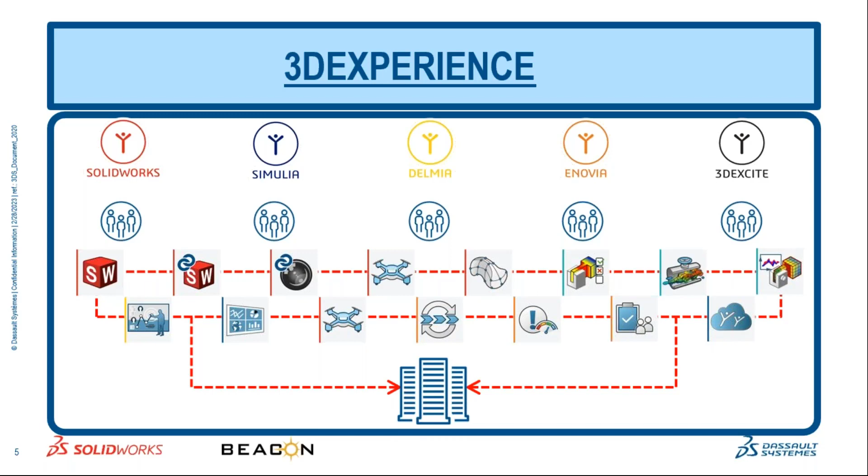So this makes sure that your complete organization or team gets to collaborate easily, smoothly, and in a fast manner.

Before we begin, today we'll be focusing on simulation, especially electromagnetic simulation. But what is simulation, and why do we need it? Our main objectives for requiring simulation are: one, to decide on the best project or product design, choosing between multiple alternatives—you will have various revisions or alternatives to your product.

But which is the most optimal or the most efficient design that you can make use of? And to perform various trade-off studies from a large pool of all this data.

Another aspect is to reduce the risk of failure. Especially in electromagnetic simulation, you have various tests or certifications that you have to perform, and you need to clear all these testings and standards. This is where simulation comes into picture, wherein you can virtually test or validate your designs even before you go ahead with a prototype.

And also to shorten design cycles. One part is the collaboration that makes it much easier to collaborate between different teams, from your designer to your simulation engineer. The collaboration is much easier.

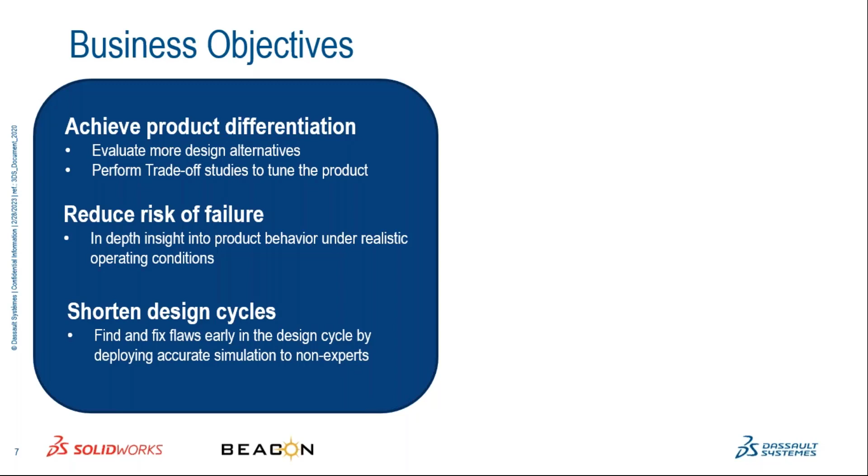And today we'll be looking at the workflow - what a designer does once the design is ready, how the validation engineer can access this data and perform analysis or simulations and run studies, and then if there are any revisions that can be done.

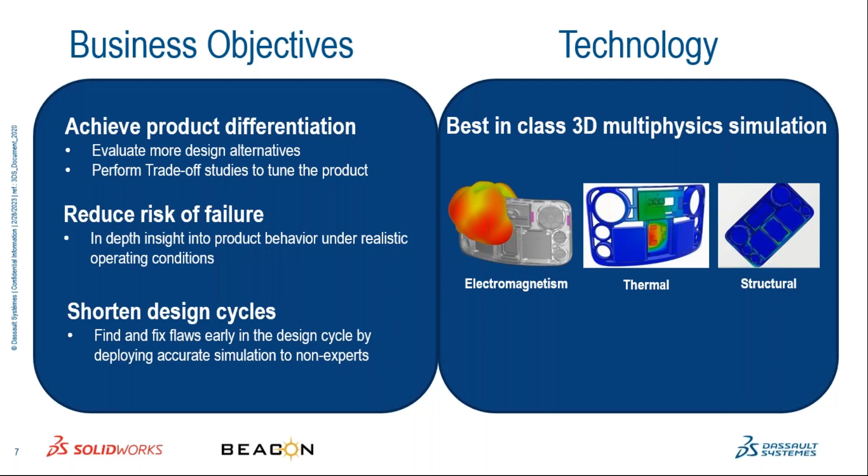Now, the technology what we have to offer. We have multiple simulation products catering to different areas, that is electromagnetism, thermal, and also structural. All this comes under our SIMULIA portfolio. Today we'll be focusing on electromagnetism.

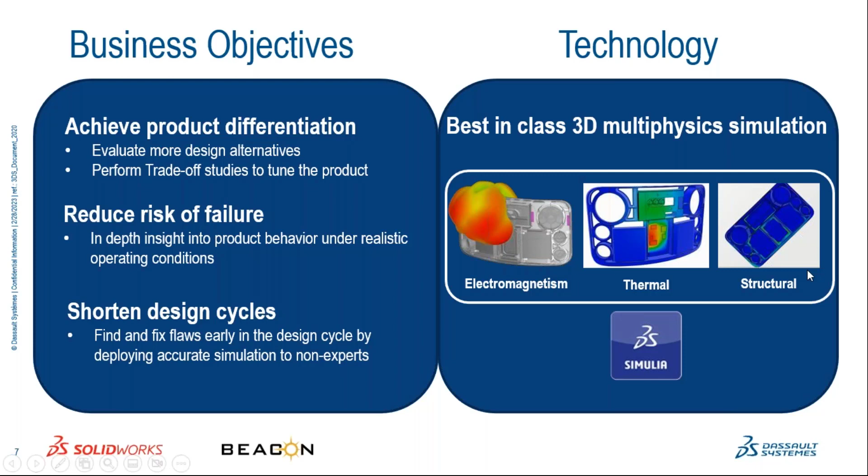So, what does the 3D experience platform offer us in terms of electromagnetics engineer? As I mentioned, because of the collaboration, there is easy access to your CAD data. Once your designer is ready with the design, he just uploads it onto the cloud platform, and the validation engineer can access this at any time.

That is one important aspect here. Another part is the version control. If he has worked on the model and there is a revised model uploaded, you can also access these revision files or data uploaded onto the cloud anytime. So the team is collaborated and up to date with whatever changes are made in the project. Another important part here is the lightweight visualization of results.

You can view your analysis once your simulation is run, the results on the cloud anytime, anywhere, on any device, using a role called 3D Play, wherein it is much faster to load and you can just look at be it your antenna far fields or any plots, your electric fields, magnetic fields. All these plots can be viewed in a quick manner.

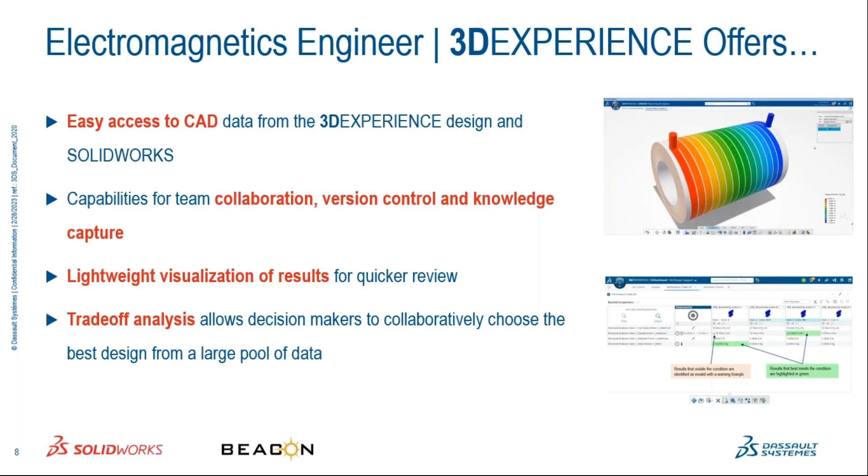The trade-off analysis also can be performed, as I mentioned, from all the different revisions or versions of your file, to determine which is the best or the most efficient design. It's much easier to choose or come to a conclusion using all the data available at your end.

The best part here is the electromagnetic engineer role also offers cloud computing. With each role, you get up to 16 cores, and this can be extended up to almost 288 cores. So that is a huge advantage here when talking about computing resources.

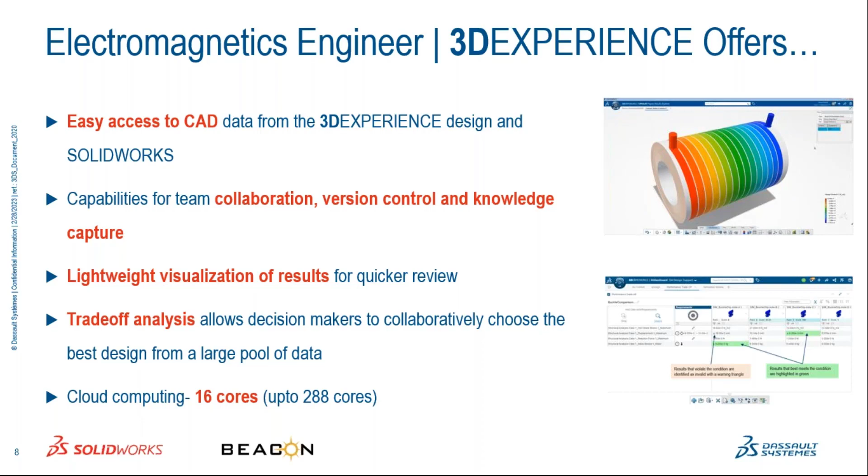Now let's move on to electromagnetics engineer. Why do we need electromagnetics engineer or any electromagnetic simulation for that matter? In today's world, we are very connected.

We have a lot of devices, or as we call them, smart products or smart devices in today's world. And everything - there's a lot of automation coming into picture nowadays, and all these are because of electronic systems or electronic components getting adopted into your system. One example is your autonomous vehicles.

There are a lot of electronics that are getting incorporated into today's vehicles. Even for electric vehicles, there are a lot of electronic components, and it becomes important that they comply with all EMC norms, all the necessary EMC norms.

Another part is there are also new markets that are emerging and moving into this EM market. Basically, your medical equipment, there are wearable devices, a lot of wearable health monitoring devices that are being made, and also for renewable energy, your solar panels and metamaterials. All of these, since they interact closely with human beings, must comply with the Bio-EM standards. These are stringent standards and certifications that they have to comply with. Using electromagnetics engineer, you can actually validate these different systems virtually and make sure they clear the certifications much faster.

And what is the product performance? We can get a detailed view into the working of this product virtually, as well as how much time it is going to take. For example, you can reduce the time to market by making sure that all the testing and all the validations are performed virtually and it goes smooth.

And if at all there are any risk of failures, basically, right from your circuit level to your PCB level, all your embedded systems, and even the assembly as a whole can be analyzed. And if they are complying with all the standards, that can be checked even before your product goes to your market.

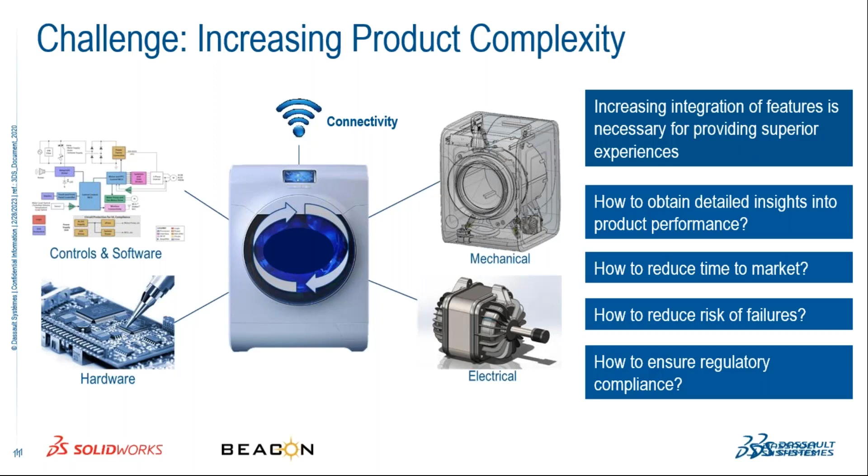Now, basically, what exactly is the solver or the engine that electromagnetic engineer uses? Electromagnetics engineer uses the SIMULIA CST Studio Suite, which is an industry-known software or tool for electromagnetic simulation, and it covers a wide range of applications, right from statics to low frequency to high frequency. So when I talk about high frequency, it can be antennas, it can be filters or other RF and microwave components and devices. It also helps you in addressing your EMC and EMI related challenges or issues.

One important feature here is the coupled simulation, which we'll be seeing ahead in our presentation, examples which make use of these coupled simulations. So you can perform electromagnetic analysis on your circuit level, system level, PCB level. You can even make use of multiphysics. Basically, there are thermal solvers, mechanical solvers available, which can be coupled along with your electromagnetic solvers. So in case of any hotspots in your design, or to identify if the heat generated causes any deformations in your model, you can make use of coupled simulations here.

There is also something called EM circuit co-simulation, wherein there is a schematic level control as well as assembly level. So that can be analyzed simultaneously, both your assembly as well as schematic, by making use of various blocks, which we'll be seeing.

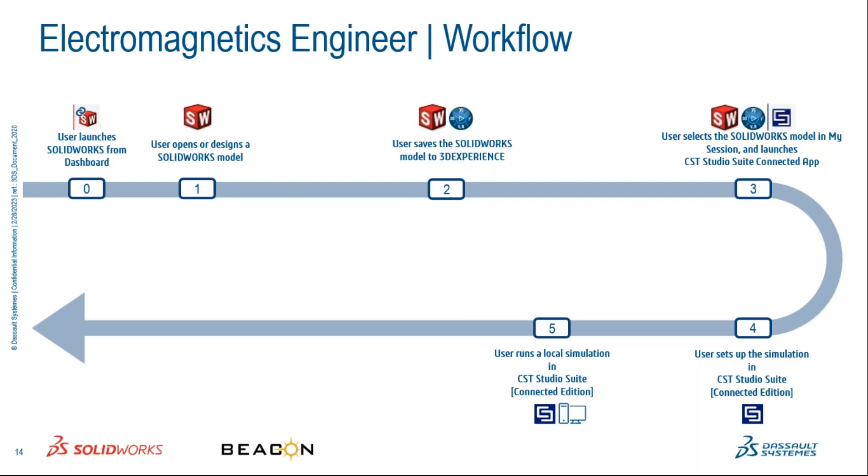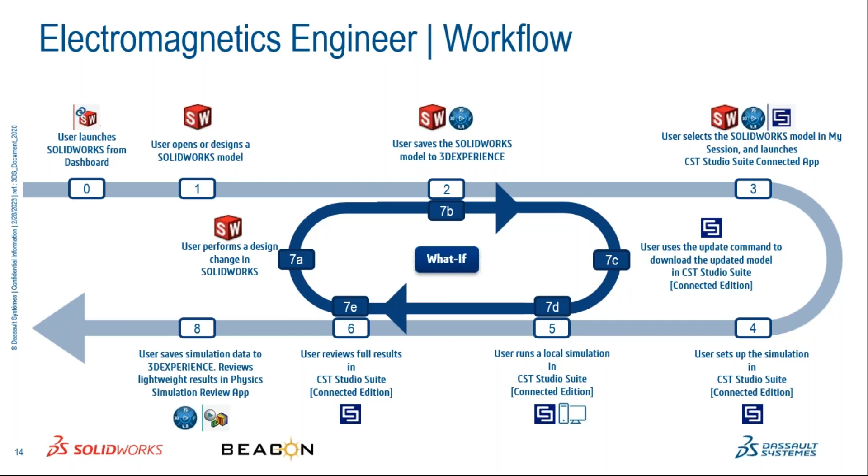Whatever required input sources or loads can be fed in using CST. Once that is done, he'll run the local simulation and validate or analyze the calculated results. He can also explore what-if scenarios, or work with a different model by letting the designer know, who can make changes. This model is again uploaded to the cloud and easily accessed by the simulation engineer, showing how smoothly the collaboration works.

Now, we'll be covering different sets of applications here with different cases. Before that, let's go through another poll question.

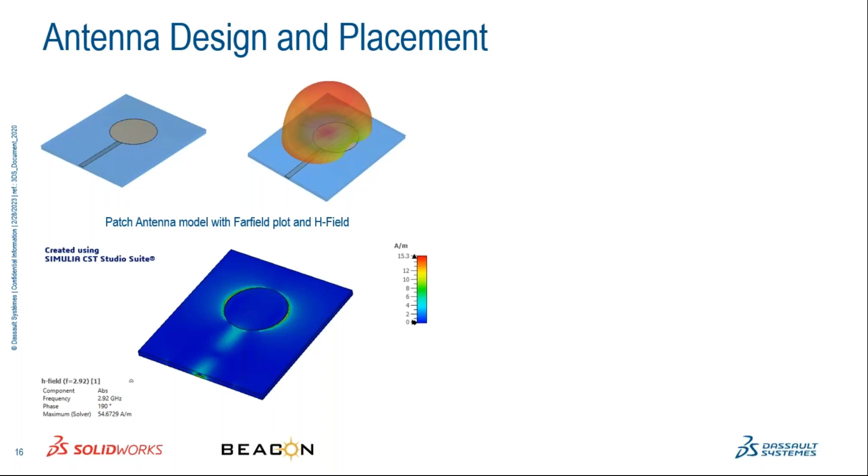Now, once your antenna is designed, another important factor is the installed performance or placement of the antenna. What happens when the antenna, once analyzed, is placed within your complete system or assembly? What is its performance? You can analyze these scenarios too: once the antenna is placed within the system, what is the radiation pattern, and how has it varied from its initial standalone performance?

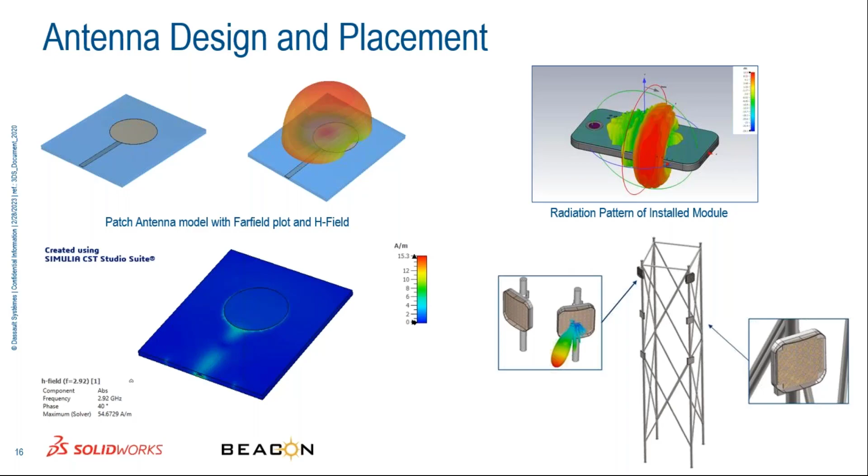Electromagnetics Engineer also comes with an antenna placement app to help you easily optimize your antenna placement and location on your systems. Let's just look at the workflow.

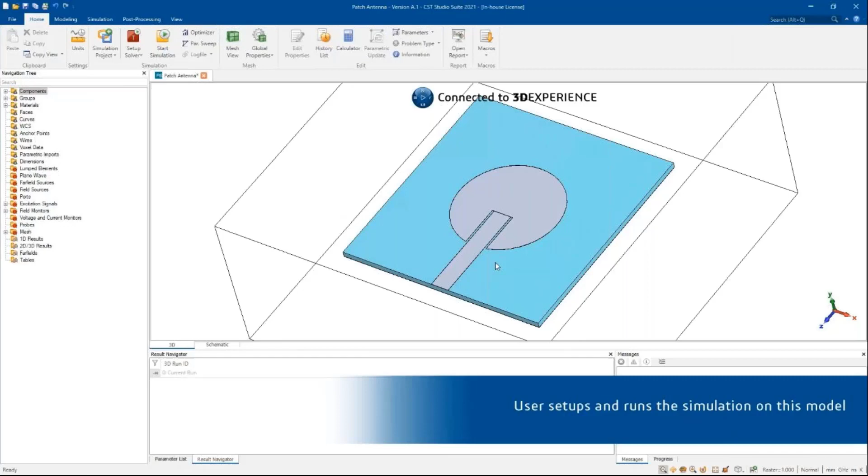So basically, the collaborative workflow here in SolidWorks: once your patch antenna is ready, the designer logs into the 3D Experience platform and loads the file onto it. Now the validation engineer can easily access this from the platform and pull it into CST. He sets up all the required loads, be it the ports for excitation, materials can be defined here, as well as any other required inputs can be fed in.

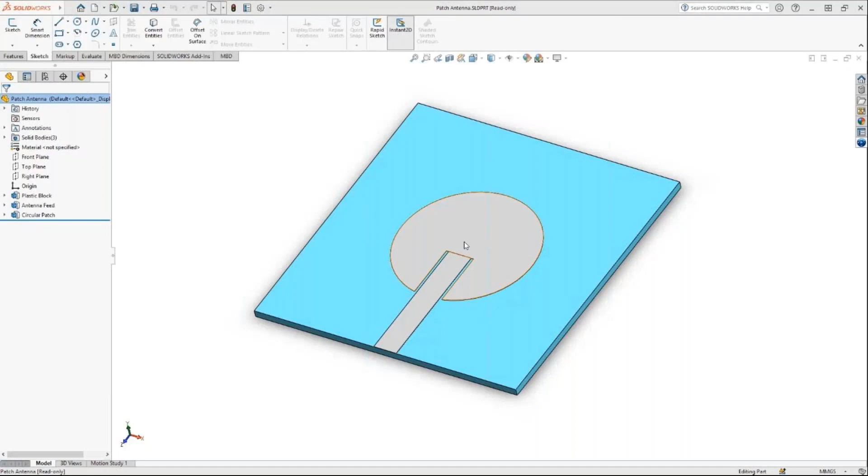Now once the analysis is done, he can also view the results, and here we see it's around 4.7, but he's looking for something at 5 gigahertz. Now the antenna validation engineer is going to notify the designer to make the necessary changes.

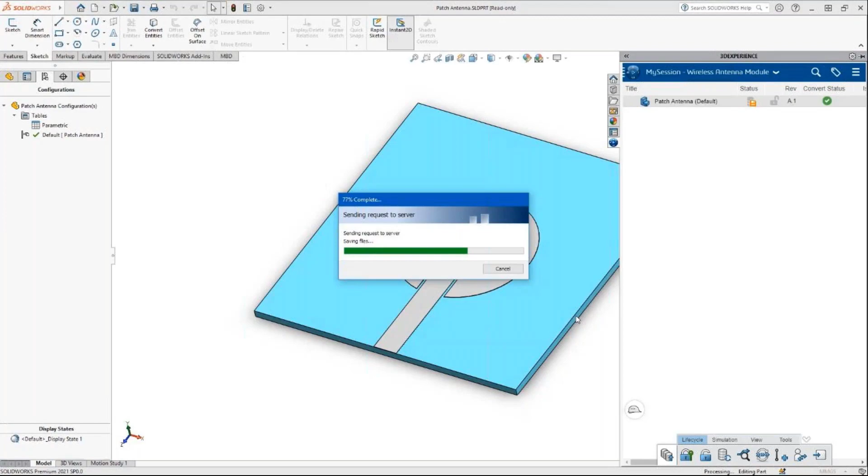The designer comes back to SolidWorks, makes the required changes to the design, and then again uploads the modified file onto the cloud. Now this file can be easily accessed by our simulation engineer, and he doesn't have to reset all the inputs or anything, because it's already set once.

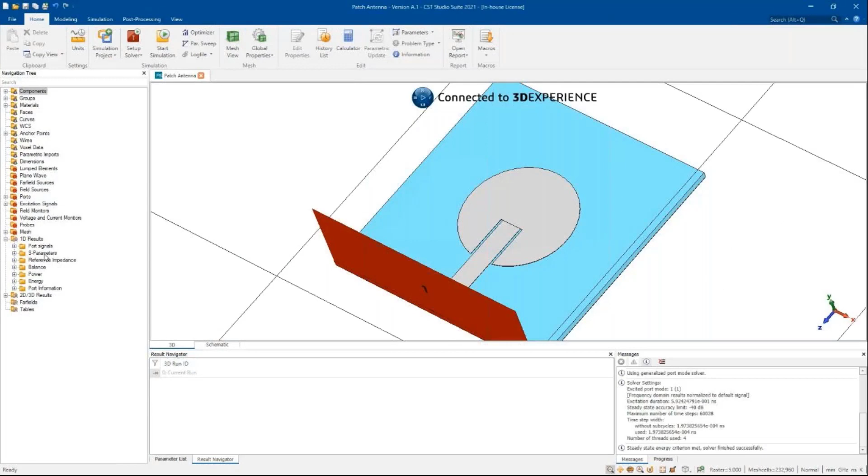So he just has to fetch the file from the cloud and rerun the analysis and view all the results and make sure if he's able to achieve the required results or not. So basically he can just rerun the analysis here, and we'll be seeing the plots, and you can see it's much better here. It's around 4.99 gigahertz, which is close to 5 gigahertz. That's exactly what we needed here. And he'll just upload these results onto the cloud platform.

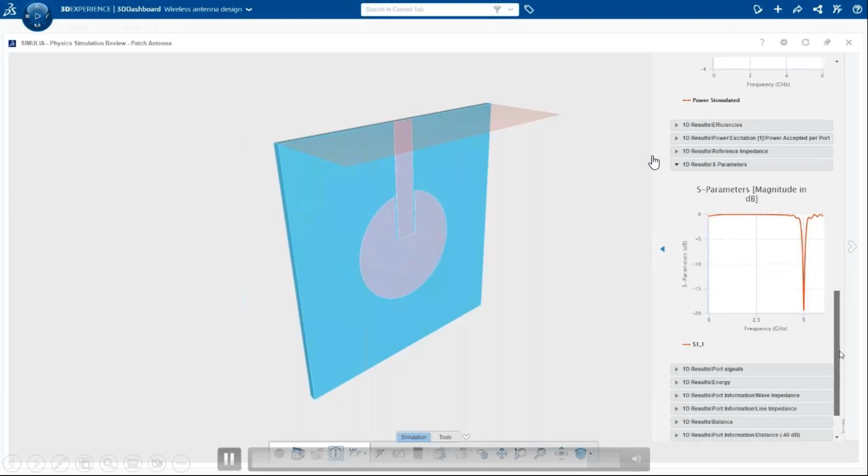Now these results will be available in the collaborative space on cloud, and can be accessed anytime. Using the physics review app, we can easily view the results here in a much faster manner. You can automatically view all the plots that get uploaded, the S-parameter plots, and also the far fields. You can view the far fields here, how they are, what the radiation pattern is, and all this can be viewed on cloud using any device.

Now moving on to circuits and systems. Basically, we'll be focusing on co-simulation here. What is co-simulation? As I mentioned, there is a feature wherein you can link your schematic along with your 3D model. So be it antennas, the antenna model can be generated as a block.

Most of you will be familiar with blocks. You have different types of blocks, right? You would have heard of SPICE blocks, IBIS blocks, Touchstone blocks. Something similar: CST will help you in generating custom blocks as well, other than all these standard third-party blocks. So you can make use of these blocks in your system level or assembly level analysis as well, which we'll be seeing. CST supports basically all your SPICE block, Touchstone block, IBIS models.

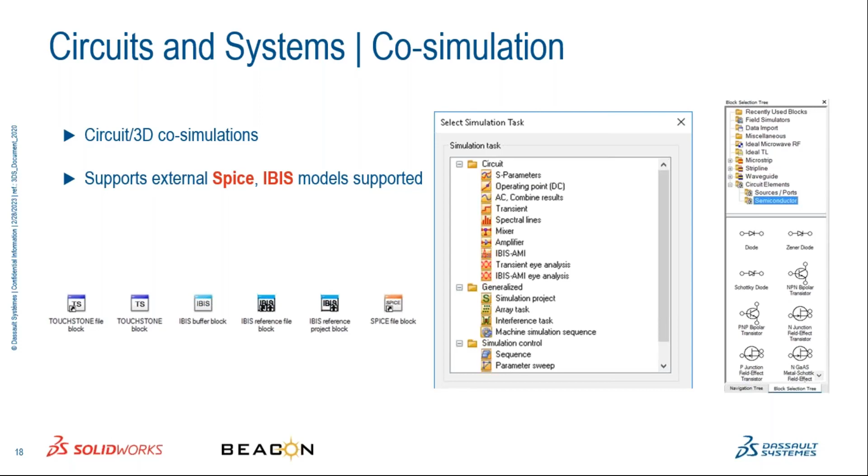Now at a circuit level, we have different types of analysis also available. To support this, we have a library of different circuit components for you to make use of, and these are different analyses, or simulation tasks, in our environment. So you can perform, if at all you have interference, to avoid interference right from the circuit level, you have an interference task available for you to make use of. Other than that, transient analysis can be done, harmonics related analysis can be done, eye analysis can be done. So these are different circuit level analyses that you can perform.

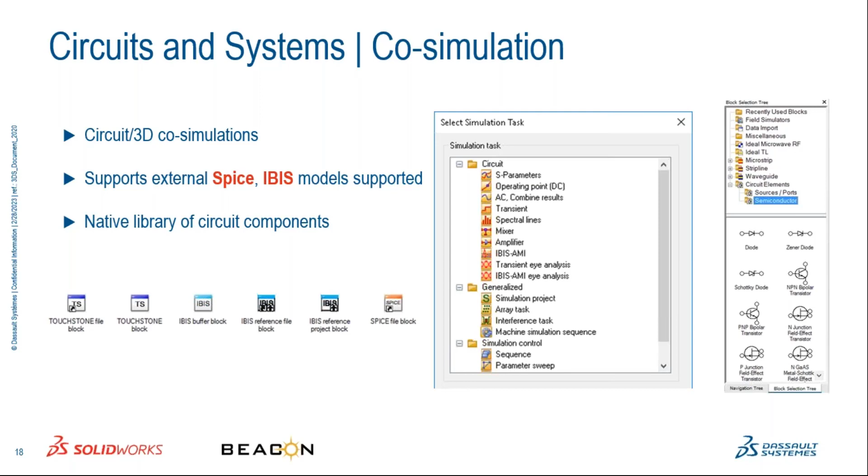Now moving on to what I mentioned about the block. If you look at this figure, this is a coupled microstrip. Basically this is a 3D model. You also have the model in the form of a block, which you can make use of in your schematics. This can be made use of in the circuit level analysis as well as coupled to run the 3D level analysis. So from the circuit level, you get all the different plots, be it your voltages, your currents, and at the 3D level, you can observe all the fields, all the currents, surface currents, if at all any losses are there, what the losses are. So all of this can be done simultaneously.

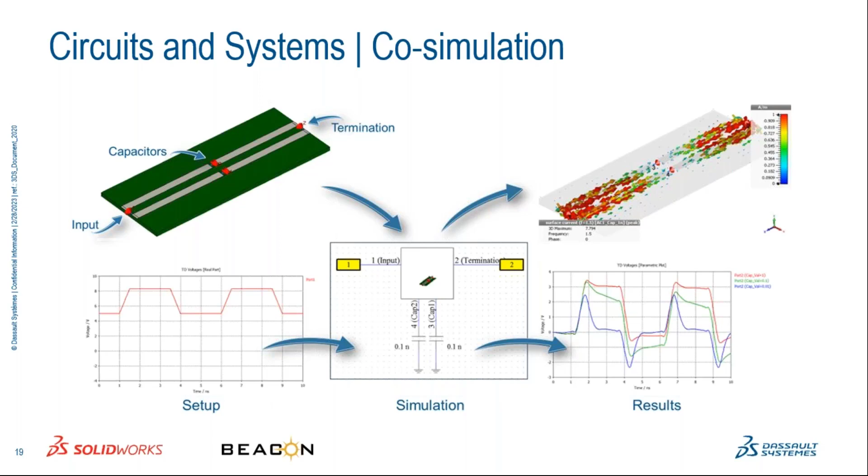Now moving on to system assembly and modeling. This is an important feature that we have here in CST. Basically what it does is it acts as a tool for sequence controlling.

If you want to perform multiphysics analysis, consider this antenna itself, it's a horn antenna with a reflector. Initially we analyze the antenna structure. Once the electromagnetic analysis has been performed, you also want to perform thermal analysis and link it. So the system assembly modeler makes sure that the link or integration between these projects is maintained. It acts as a project manager with thermal as well as mechanical analysis for deformation. All these are linked with the master project, so any changes you make later can be linked to all sub projects, and you can rerun these thermal and mechanical analyses at any time. This is basically what system assembly and modeling is.

Hybrid simulation is another feature wherein, for example, this antenna will have a certain radiation pattern falling on the reflector. But what happens once the waves or radiation are reflected back from this reflector? How is it in turn affecting the radiation of this antenna? So this is a two-way cycle: one is the radiation pattern from the antenna, which is unidirectional, but it also supports bidirectional analysis, where you can see the effect of the reflected radiation on the radiation of the antenna. That's another feature we have here.

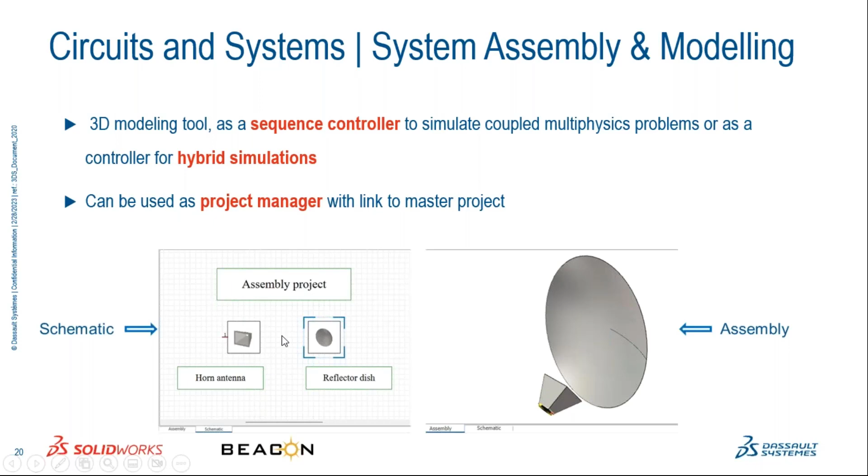And this is all controlled using the system assembly model. Basically it's like a schematic with all your blocks, so you have your schematic level as well as the assembly model with the assembly as well.

Moving on to PCB analysis. When we talk about PCBs, we'll be working with different PCB design softwares, be it Altium, Allegro, Mentor Graphics, and others. There are various files that CST supports, and basically all these different files are supported by CST.

You can also make use of neutral or generic file formats such as ODB++ and import these files into CST. Once the model is imported, the design rule checker or board checker checks for any overlaps or discontinuities in your design or in your nets. There is a design rule checker you can make use of, and there is something called IR drop analysis, which is nothing but the voltage drop across various components in your design.

The best part here is whatever losses are computed from this IR drop analysis can be directly integrated with the thermal solver. We also have a conjugate heat transfer solver which is directly linked with the electromagnetic solver, and all the losses are fed in so you can go ahead with the thermal analysis on your PCB as well. Now let's see the workflow for a PCB level analysis.

We'll be performing power integrity analysis here. Before that, the designer is making use of Altium to design his file. There is an Altium connector available on cloud, so he just has to upload the files onto the 3D Experience platform, and these files can be directly opened within CST for the PCB level analysis.

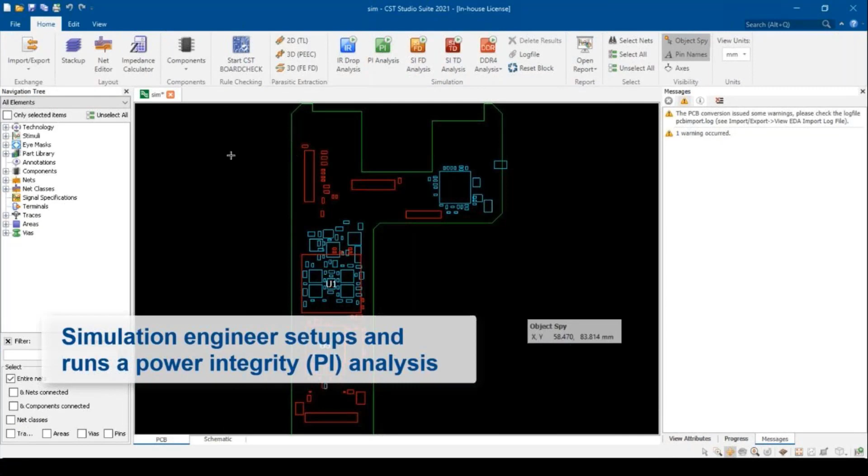Here you can see the power integrity analysis that is going to be performed. You will be selecting all the required nets and defining the grounding and power nets, then selecting the power pins and running the analysis. Once the analysis is run, you can view different plots and graphs.

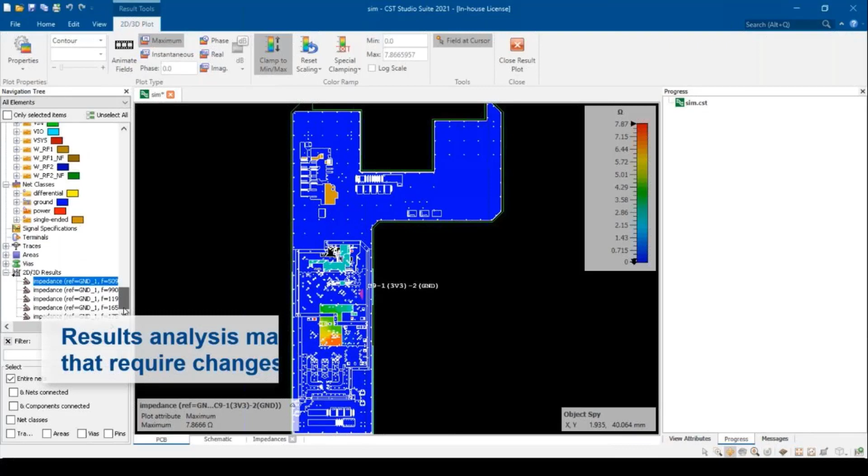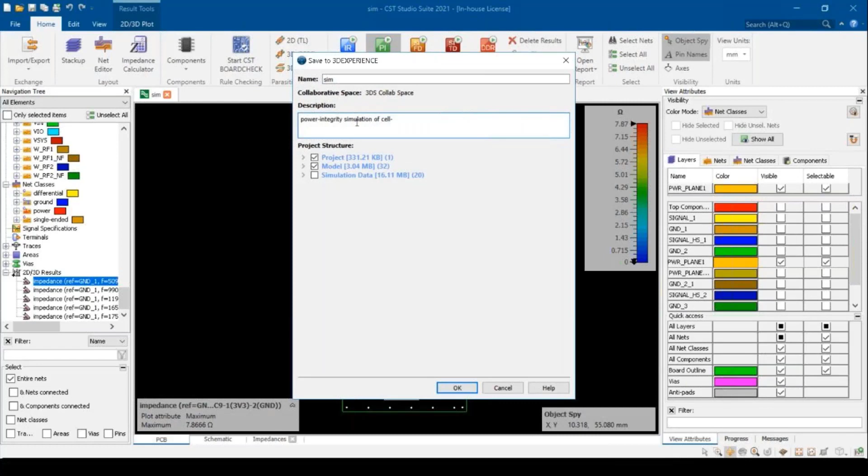One being your impedance plot or impedance mapping, which will identify regions where your impedance is high. If you need to add any decoupling capacitors, or if there are decoupling capacitors and you need to change any values, once that is done, the result is analyzed. He can just upload the results onto the cloud by giving a name and description, and uploading the simulation data onto cloud.

Now this can be viewed on cloud anytime. If any changes are required, the PCB designer might make some changes, and again these files can be fetched from the cloud. It can be imported, you can re-import the content here and rerun the analysis.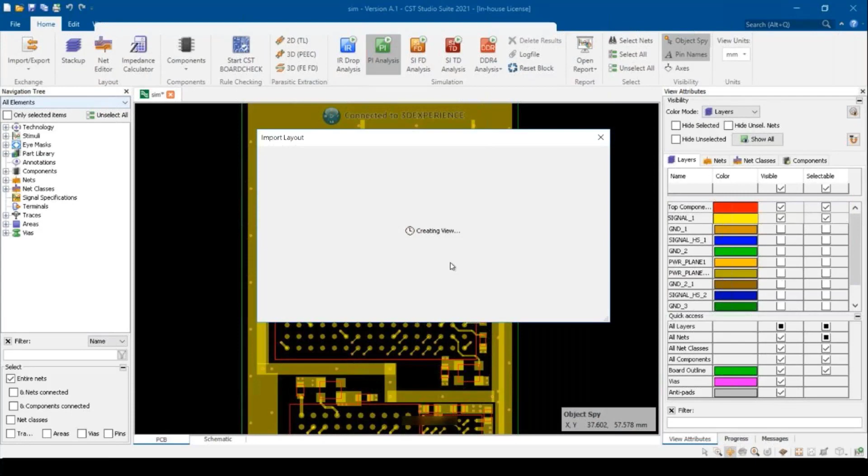So these are different features. This is just power integrity. Similarly, signal integrity, IR drop analysis, and also we have a DDR4 wizard for any type of DDR technology. So this is our EDA related interface, or whatever features that are available within CST.

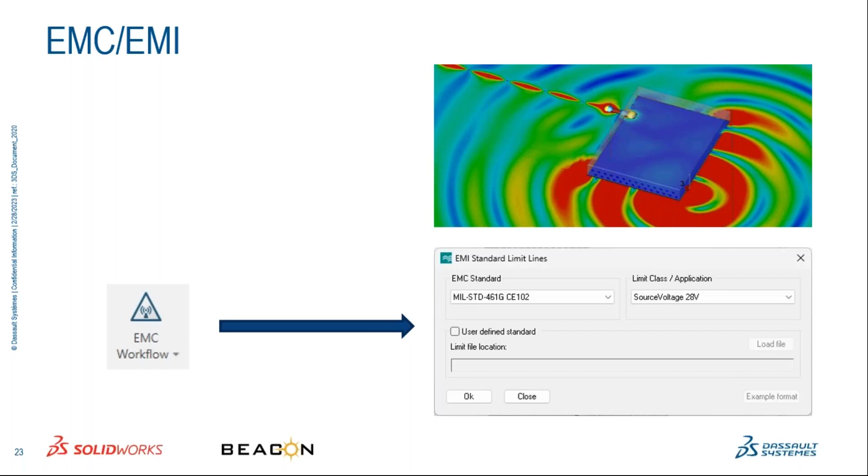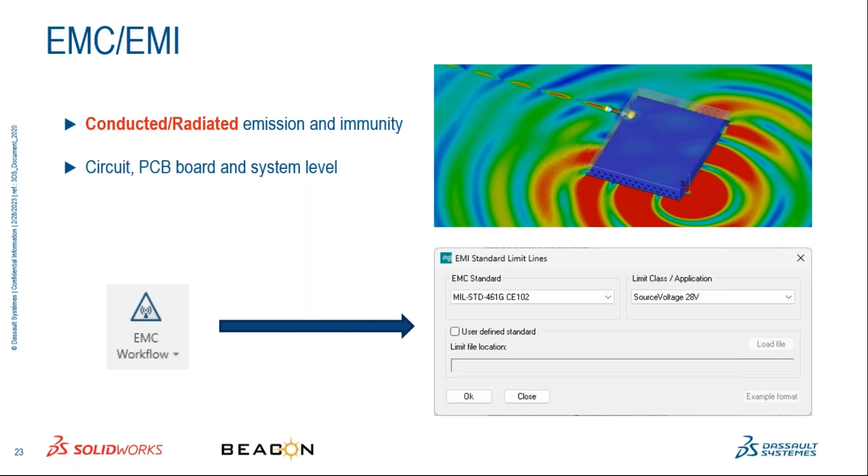Now moving on to one of the major concerns, or the most important part in any electromagnetic system, when we talk about EMC and EMI. Basically, when we talk about EMC and EMI, it can be either conducted or radiated emissions, or the susceptibility or immunity of your system. It can be at circuit level, at PCB board level, or even at system or assembly level. And CST supports you, or helps you, in analyzing all your emissions and noises right from circuit to assembly level.

There is also an EMC workflow available within CST, which can help you set up various tests and comply with various standards. There are a lot of standards you follow, and by default some standards are included. If you have any other standards that you work with, you can also define a user-defined standard. You just have to upload the file with the right test conditions, or the right sources and values, which will be loaded, and you can perform the analysis.

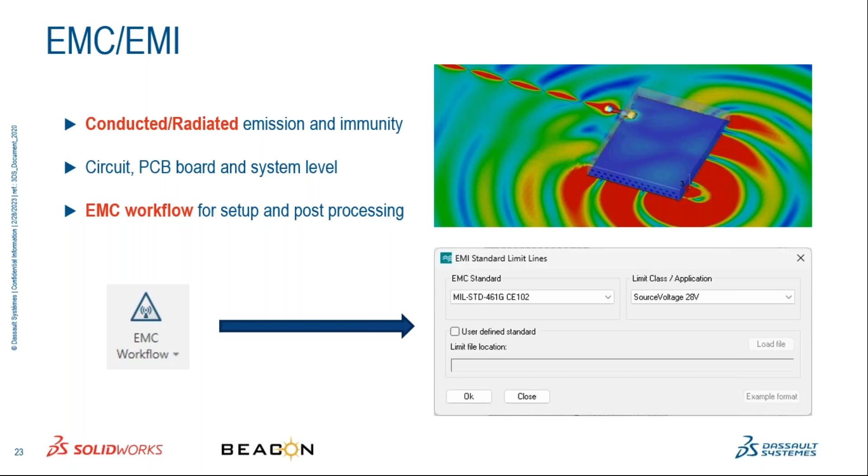So this EMC workflow makes it much easier to set up the analysis and also to analyze your results in the post-processing part. So let's just look at an example of conducted emission here.

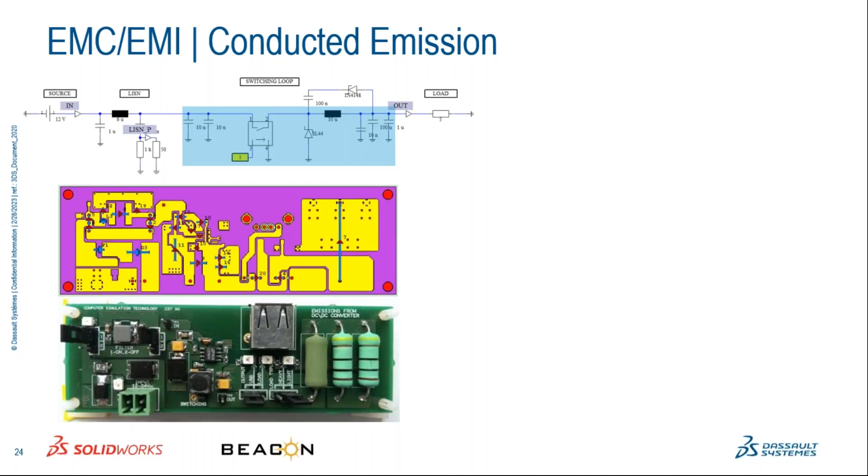This is basically a DC-DC converter used in an automotive vehicle, stepping down the voltage from 12 volt to 5 volt. Here you can see we have the circuit schematic as well as the board available. Initially we'll be analyzing this circuit for any noise that is generated or incorporated during the switching action of the circuit. When you run the analysis, you can compute what noise is generated in the circuit.

From the plot you can see at around 0.48 megahertz you get around 100 decibel microvolts. This is the noise level getting incorporated in your circuit during switching. Right at the design stage itself, if you want to mitigate these noise levels, you can add in the required filters and optimize the system at the circuit level itself.

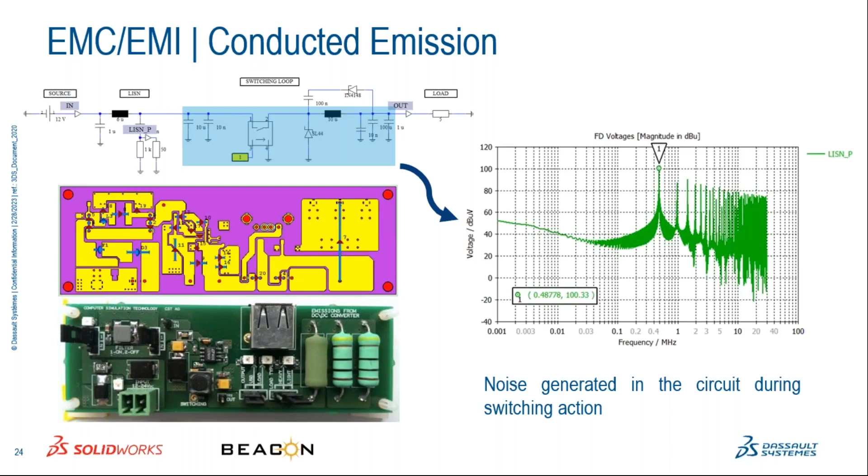So basically, right before your prototype is created, or you're going ahead with your design or manufacturing, you can virtually make sure that all your model or design complies with all the required EMC norms or standards.

The next example we have is of radiated emission. Here we have a case of a smartphone, wherein, again, when we talk about EMC, shielding is a very important part, be it shielding of different electronic enclosures or shielding of even cables. These different scenarios and applications can be analyzed here within CST using Electromagnetics Engineer.

Here we have a case wherein we are analyzing the shielding effect of the enclosure of the smartphone at two different conditions and two different frequencies: one is at 2.5 gigahertz. What is the radiated emission when there is no shielding, or when it's unshielded, versus at 2.5 gigahertz when it's shielded. From the plot you can see at 2.5 gigahertz we are able to mitigate the radiated emissions in a quite good manner.

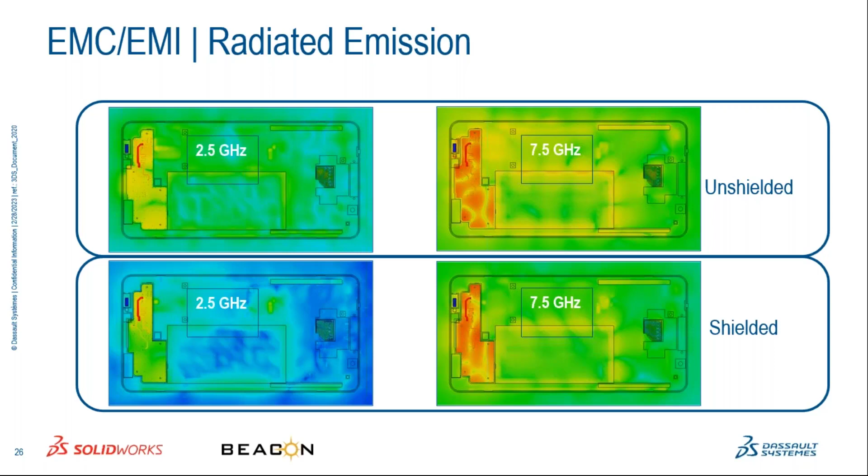These are important decisions that you can take right at the design stage itself, without waiting to go ahead with a prototype, then testing, identifying these faults and failures, and going back to redesign all over again.

So that is another part. Now moving on to bio-electromagnetics, which is nothing but all your medical, life science related applications. We have different systems: imaging systems, development systems, implants, and electronics and communication. For example, your smart watches, wearable devices, and CST can also help in cancer detection devices, etc.

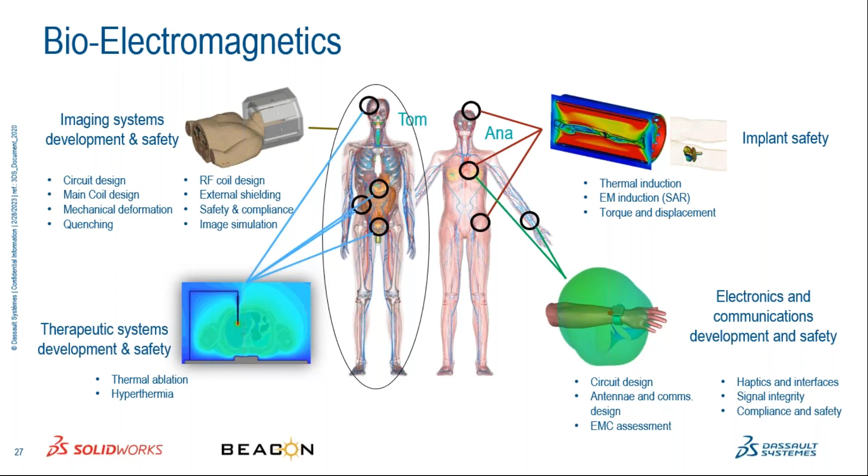These are various applications with different parts or areas that need to be analyzed, for example right from circuit design to, sometimes, coil design and analysis in case of MRI coils, and even safety. That is because these devices closely interact with the human body, so what is the absorption rate or specific absorption rate, the radiation or power absorbed by the human body from these devices. CST also has a biomaterial library with different human body models available, including tissue, bone, and different organ materials that you can use to identify or calculate the specific absorption rate and make sure it is within legal limits.

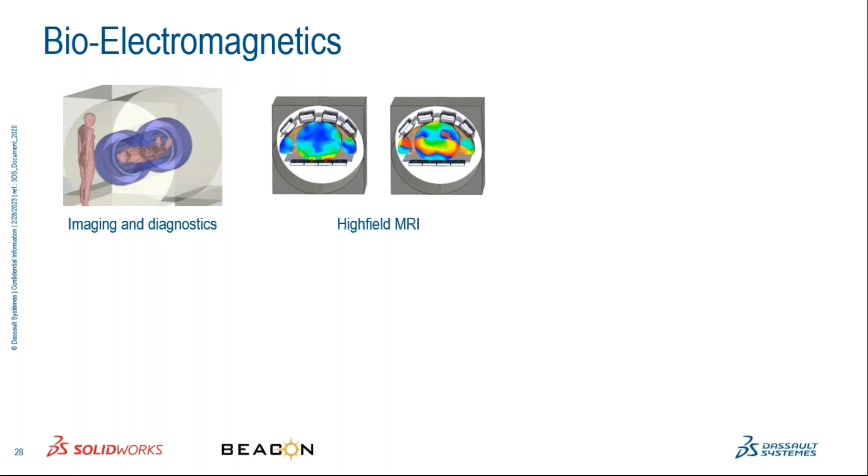So let's see what are the major application areas. As I mentioned, one is imaging and diagnostic devices. Then MRI coils, and the absorption the human body experiences when within the MRI coils. Also brain cancer detection, thermal cancer treatments or ablation, and various implants that are used, which can be hearing aids, hip implants, pacemakers. So you analyze the working of these different implants under various different conditions or scenarios.

You can do all of this virtually. You can make use of the biomaterial library, pull in human models that are available, and make sure your specific absorption rate is within the legal limits.

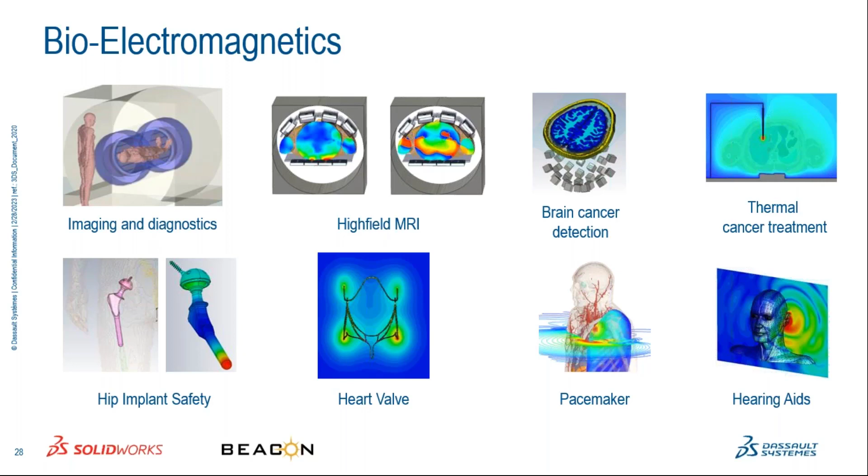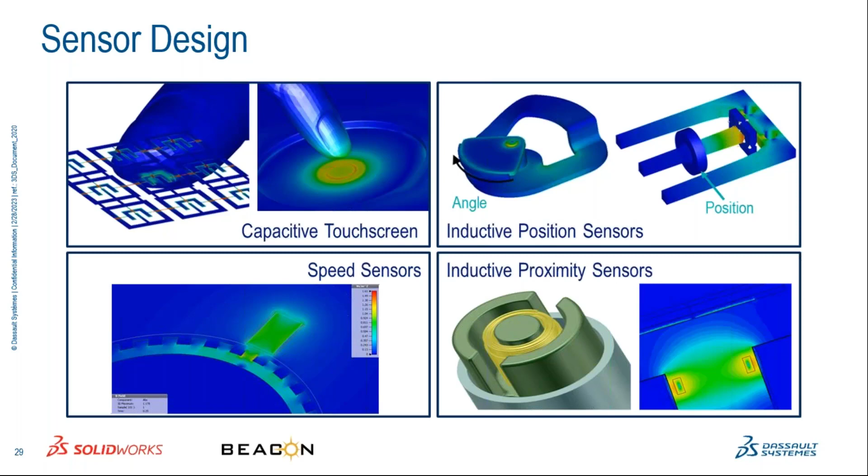Now moving on to sensor design. As I mentioned, CST can also help you analyze different types of sensors. Here you can see capacitive touchscreen sensors, inductive position sensors, be it angular or linear position sensors, and then proximity sensors, speed sensors. There are various sensors, and all of these can also be analyzed virtually within CST.

Now to summarize, we have gone through what exactly is the 3D Experience Platform, how it on cloud can help us collaborate between different teams in our organization, even different teammates in the same team. And we have seen the Electromagnetics Engineer Role, which makes use of CST Studio Suite, and all the features with respect to circuit level, assembly level, and the workflow followed once your design is ready, how it can be pulled into CST for electromagnetic simulation.

We've also covered different applications that CST can help address, such as antenna design and placement, circuit and PCB level analysis for signal integrity and power integrity, also computing losses, thermal analysis, and for EMI and EMC related applications, computing emission levels, be it conducted or radiated, and also EM immunity.

Moving on to the bioelectromagnetics part, we saw how we can make use of the existing bio library within CST and analyze different medical equipment and different scenarios where these are affecting, or when humans are interacting with the systems, whether they are safe, whether they can meet EMC and EMI requirements, and also different sensor related applications.